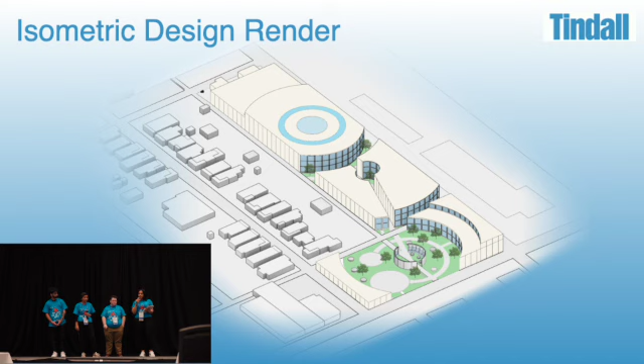This water feature represents Franklinton's present, flooding with possibility and hope. It is situated so occupants who enter the site are immediately immersed in the experience of the hub.

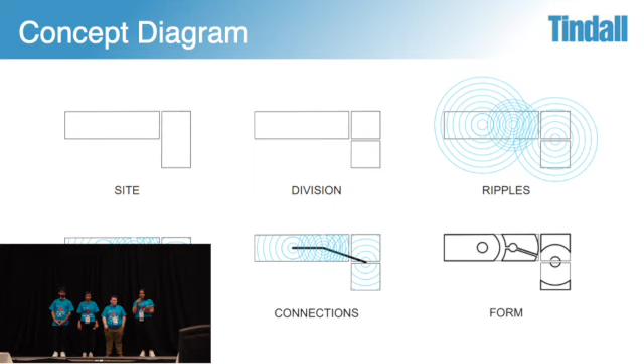Devastating floods are a part of Franklinton's rich history. With this 3-droplet ripple design, the FCH reclaims a tumultuous relationship between Franklinton and water through aesthetics. These are 3 points of impact on the site, one representing present, one representing future, and one representing past. And that's how we got our form.

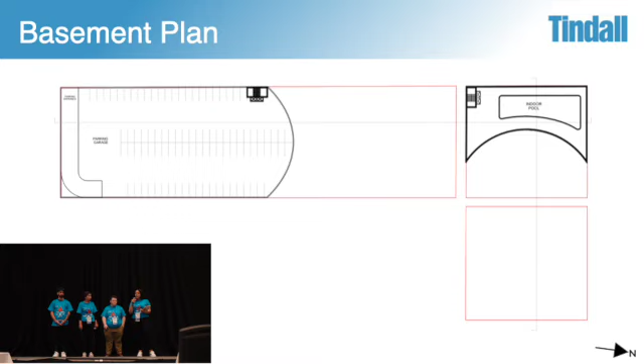This is the level of the basement. We have a 120-car parking garage. We decided to locate it in the basement because we didn't want to have any parking taking up space where we could have program and other engaging activities, and we also have an indoor pool located on that level.

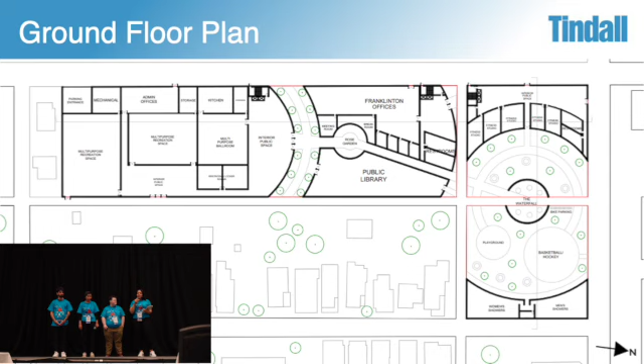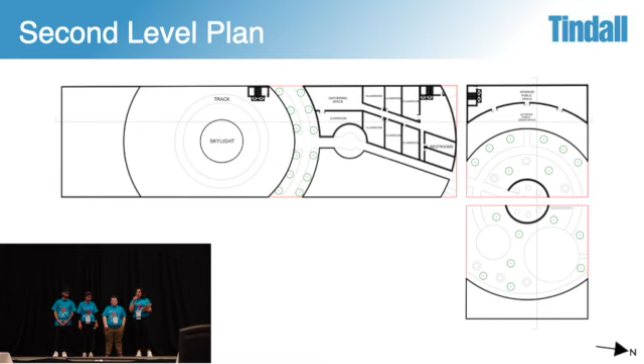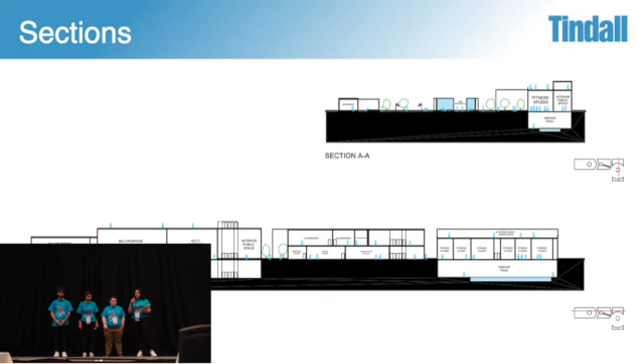Through these sections, you can see we wanted to keep it at a human scale so the buildings wouldn't be so intimidating or taking up too much space in the community, and seeming more welcoming.

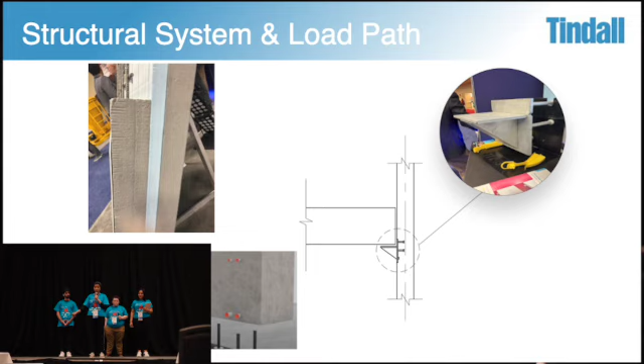So our load path for the gravity load was slab to beam to columns and shear walls to foundation. As for the load path for the lateral system, it was shear walls to foundation, very straightforward.

As for the load resisting system, we took into consideration the Columbus, Ohio area, and found that wind is going to be effective. We resisted the wind load by designing the roof and shear walls strong enough to resist it. As for snow and rain, we resisted the load by having a very strong roof that can resist these types of loads. As for seismic, for Columbus, for our site, the seismic design category is seismic design category B, which is not a very big seismic area.

However, we counted for this by having exterior shear walls for all these spaces, which can resist also the lateral load and the gravity load, and we also counted for the gravity loads.

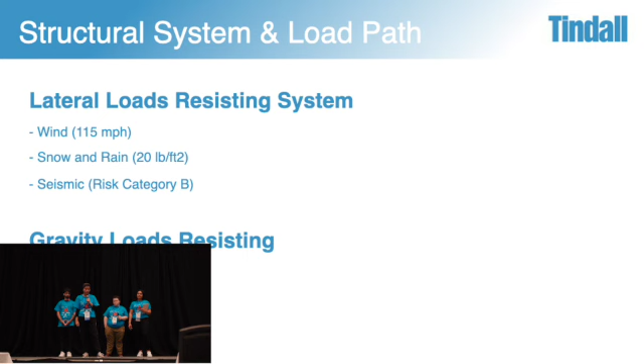We also made sure that spaces are wide enough, like for the multi-purpose facility building, so that it has flexible usage, with movable furniture that can change the purpose of the multi-purpose facility space.

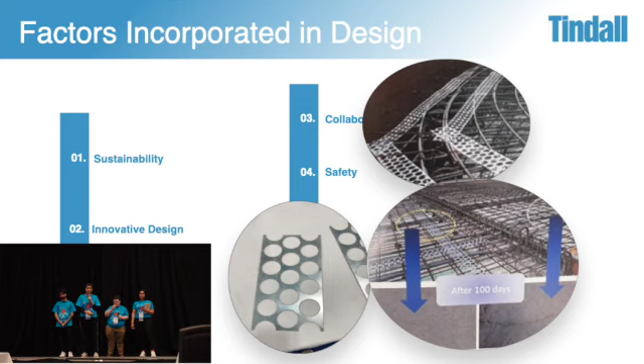Finally, safety. We accounted for all loads that might be experienced in Columbus, Ohio. Also, since this is a precast building, we don't have the same risks, making it a safe environment for people. Specimens are cast and designed in the factory, so it's a very safe environment.

One of the biggest conversations we had as a group was panel considerations, because of the architectural and structural ties between paneling and our design, and what we want to accomplish structurally. We broke the panels down building by building, breaking each face down, and decided to go with 12-foot wide dimensions, with our tallest panel at 60 feet tall, though half of that will be underground for the parking and the pool.

This still allows us to keep a very low profile structure spread across the site. It keeps it to a human scale, and we're going to be using acid-etched, grayish tan colored concrete, mimicking the Kosai Museum in that way.

We would have two main formworks that would be modified each time we're pouring a different size panel: a curved form, which follows the same radius so you can use it over and over, and a flat form. This allows us to keep in mind sustainability factors, including environmental sustainability, time efficiency, money, and other important factors that come into play when erecting the structure.

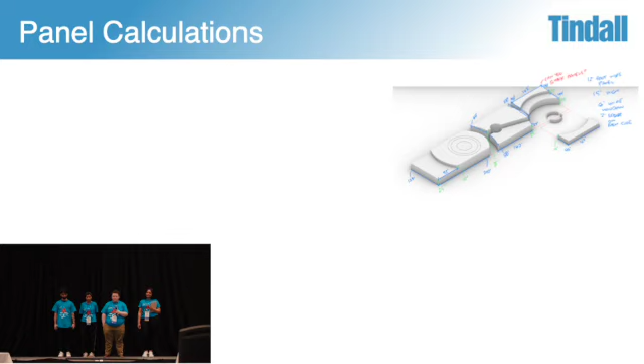When a great structure comes, you need great planning, or else the structure will never be completed. First, when awarded the bid, we would do the shop drawings, which would take about 2 weeks, then get approval in another 2 weeks—that's about a month right there. Altogether, it's going to take about a 7-month period.

We were going to do utilities because we don't want Franklinton to be underwater once again, which I'll show you a brief illustration of.

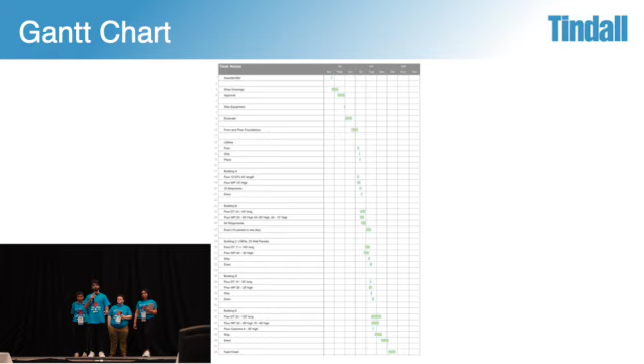Then we start with building A, pouring the wall panels and T's simultaneously together because we have two different forms. The wall panels are about 200 feet long, so we're able to pour multiple wall panels at one time. This continues until we come down to cleanup, getting rid of the lifters and making sure the site is perfectly clean.

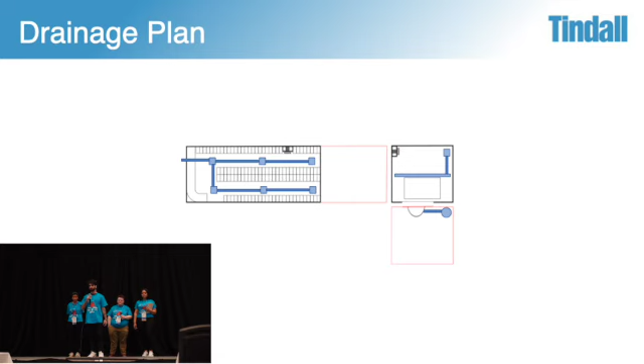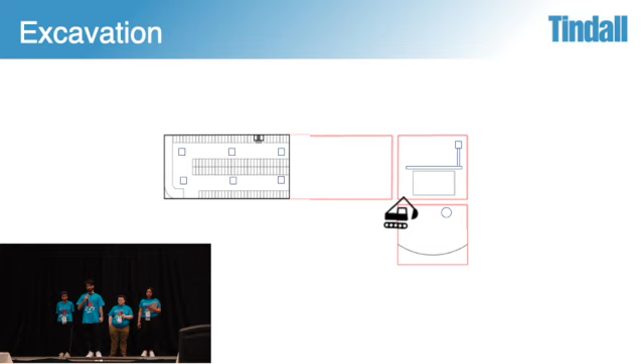First, we're going to have the deliveries. As panels come in one by one, we need every single panel before we can start construction. Then we'll be able to erect the first building, using a base system to hold the wall panels in place, then move on to the next building, and after that, the third building.

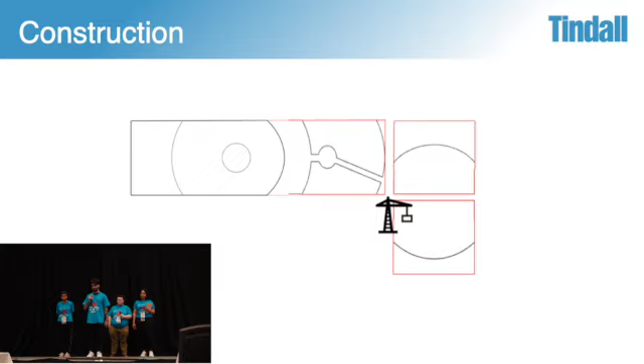And that was our project. Franklinton has a great way of going to the future, rippling into time for the positive, and you can't spell Columbus without us.